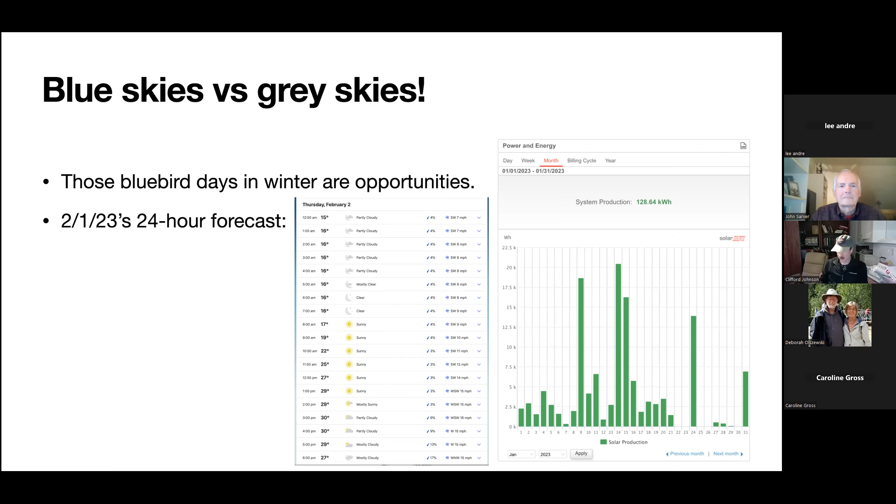So when I take an active role in managing our solar usage, I'm just basically thinking, is the sun shining or not? The key, what I found, is if it's yellow - if that sunlight shows, if it's not that silvery gray kind of diffuse light, but if you can see some yellow to it, even if there's a veil of clouds - you're going to get most of your power. Again, in the summer, the output of a cloudy day versus in the winter, I estimate for our system it's something like 6 times more. So, big difference.

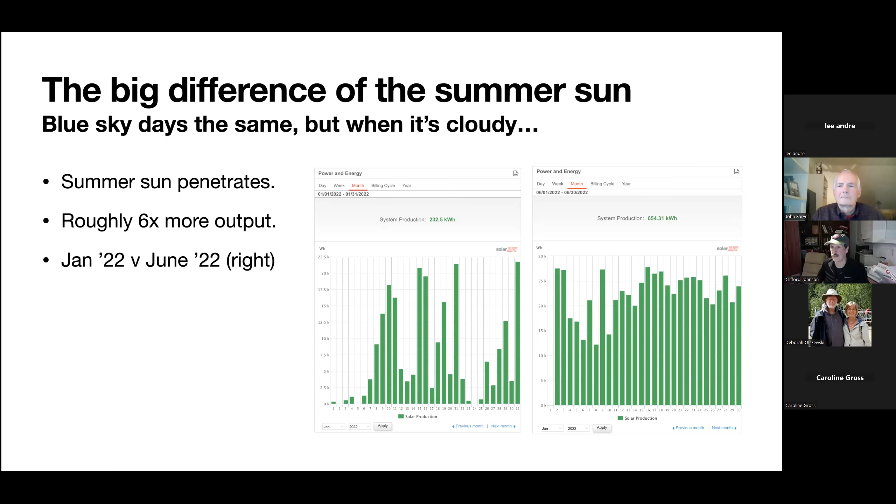That's what you want. We don't have that, but we've found that we still get a fantastic output from our system, even with the limitations of the neighbor's house and the treetops.

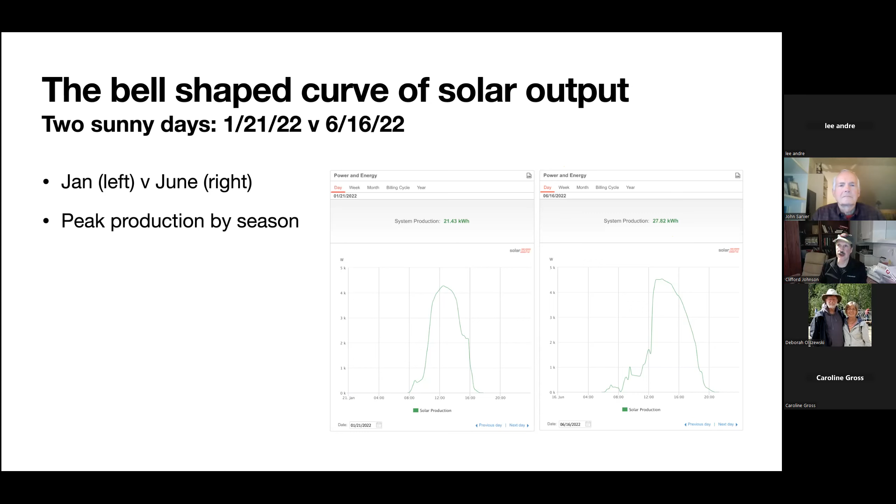Now, if you're going to do what we do and manage actively, you need information about not just your time of day and how much sunlight and what kind of output your solar panels have. You need to know about your own usage. At first, what I did - I didn't have the Insight app - I just Googled things like, well, how much electricity does a dishwasher use? How much does a washing machine use, and so on. I have to tell you, the information I got from this DTE app was so much more accurate.

The good news was our major appliances use about half of what they were predicted to use, which was great. And of course you also see, well, let's say it takes 800 or 1,000 watts to run the dryer, but the whole cycle doesn't take that too. So that's something to know about.

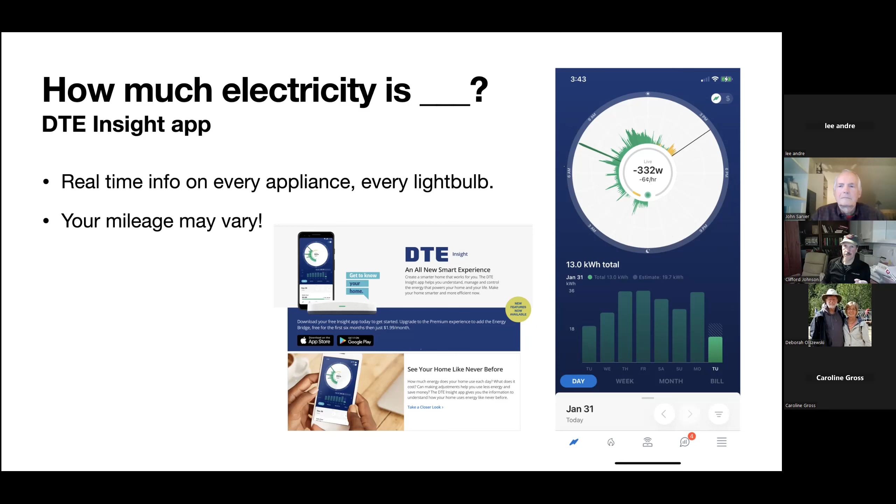So as I said before, about 15 minutes ago, the idea is to make hay while the sun shines. When we have solar energy, there's a difference between afternoon and morning versus that peak when we're getting maximum power. Use energy accordingly. The idea is to try to get as close to using all the solar as we can without being foolish and wasteful.

I can just keep hitting that minus until I get down to that zero level using my Insight app. The black one is just a standard charger, the one the car came with. I had to buy the level 2 charger individually.

The black one is just a standard 1,500 watt charger, so I can plug that in. This time of year, on a sunny day, I can plug it in at 10:30 in the morning, leave it in all day, and not even have to think about it. It'll probably take 6-7 hours to fully charge the car. If I've got that kind of time, that's what I prefer to do.

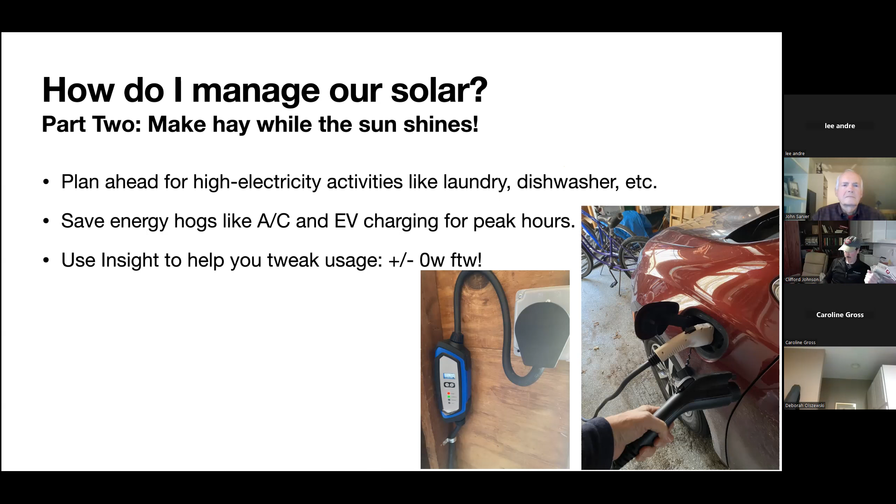As I said before, the enemy of solar is shade, which really blocks solar power more than you might think. If you're thinking about getting solar, you absolutely have to evaluate that. Clouds - I showed you how that works by season - and then there's snow.

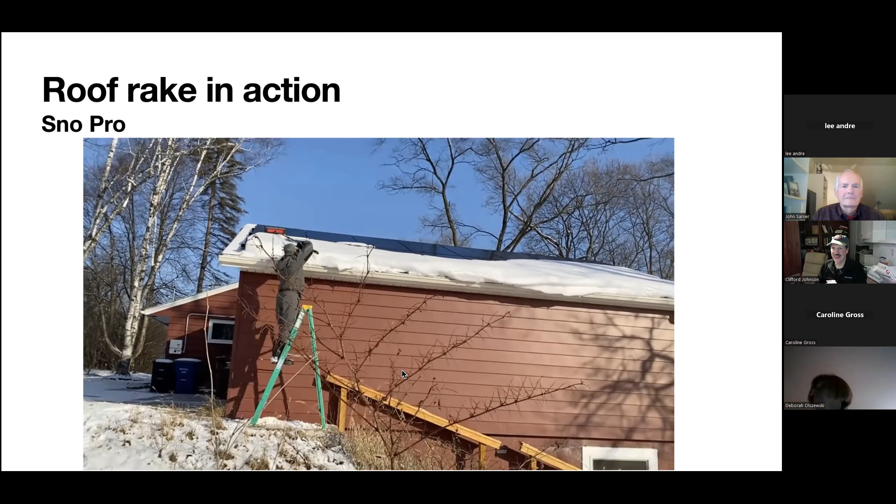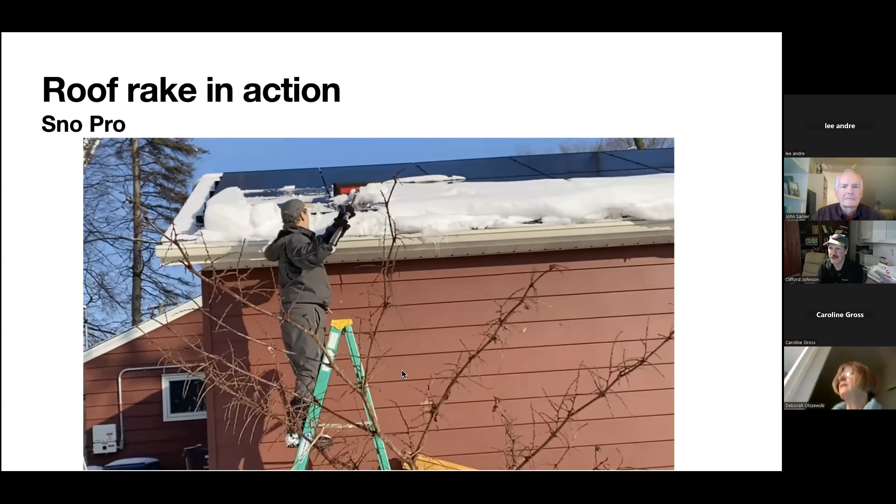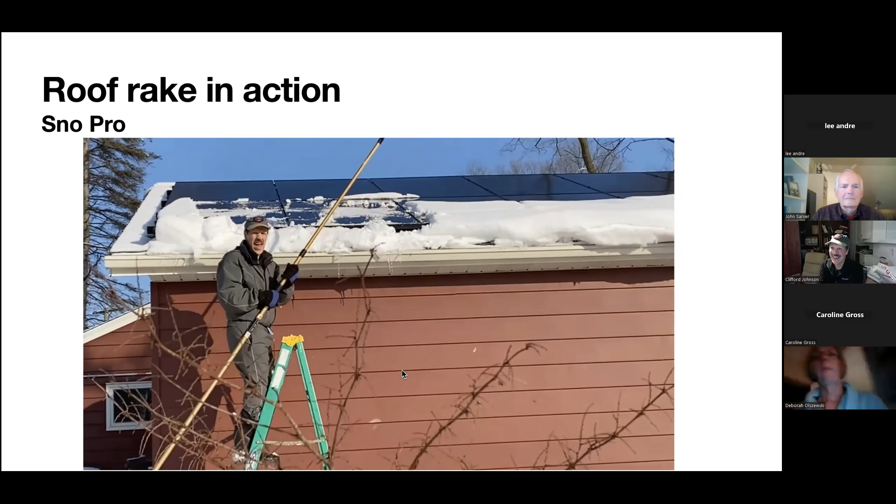Here's our video element for today, because that's me up on the ladder a couple days ago. Talk about micromanaging - I bought that roof rake the first winter we had solar. It happened because there was this beautiful blue sky day in December, and we were getting zero power, and it made me crazy. I couldn't stand the thought of all that going to waste. So I went out and bought this. It was less than $100.

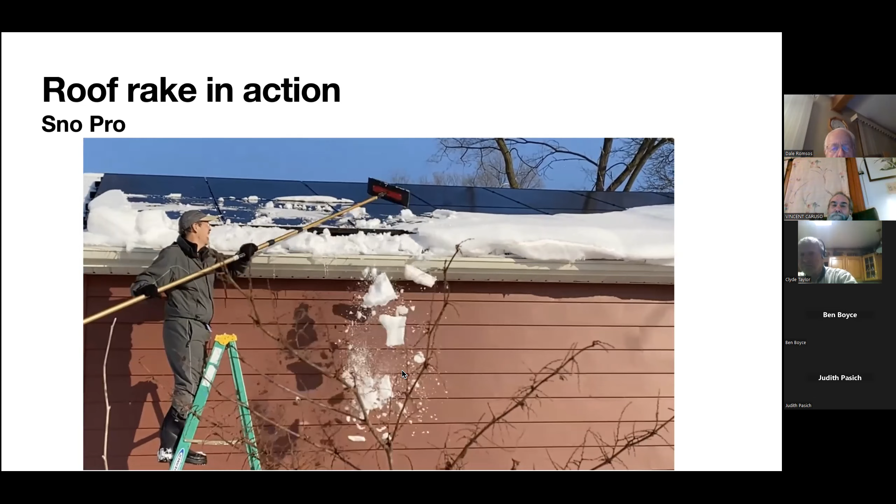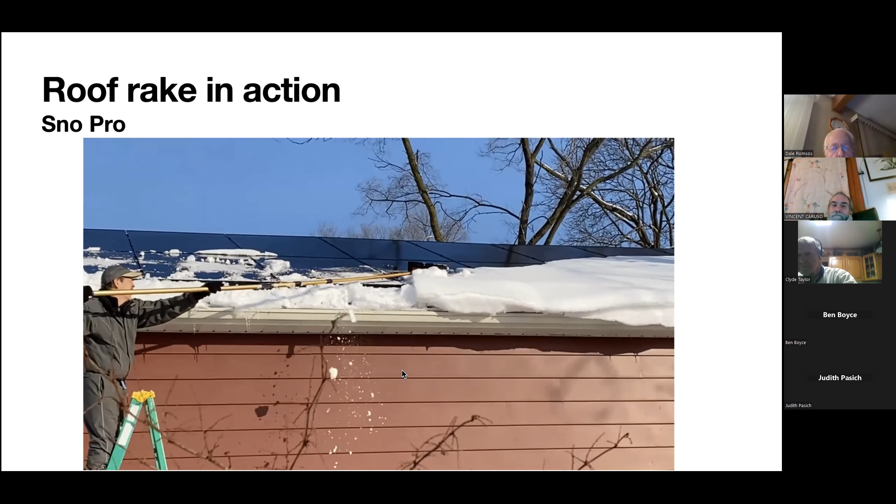It's called Sno Pro, this telescoping kind of rod. I want to show you - you can see on that glass, it just comes right off. You don't have to do this; as you can see, it was starting to come off just with gravity and the sun beaming down on the roof. But I'm an impatient sort. I don't want to waste energy, so I get out on the ladder and do this from time to time.

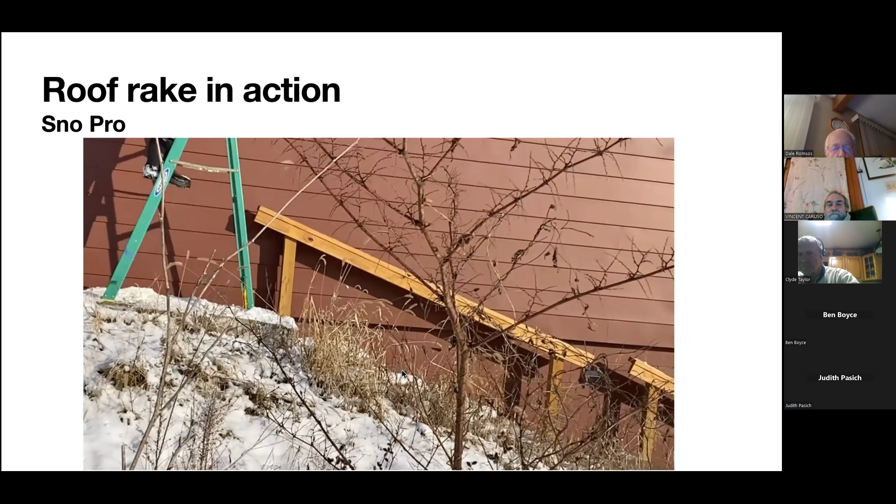Looking ahead, based on the information we have so far, we seem to be on track - when we bought the system, I rule-of-thumb guesstimated it would pay for itself in 10 years. A year and a half-ish later, we're more or less on track for that. So after 10 years of owning this, it's going to be all profit - it will have fully paid itself off. If you or anybody you know is on the fence, it's not really an expense, it's an investment. After you pay it off, and of course you get that nice federal benefit at tax time, then it's just money in your pocket for as long as the system lasts. From what I can tell, they last a long time.